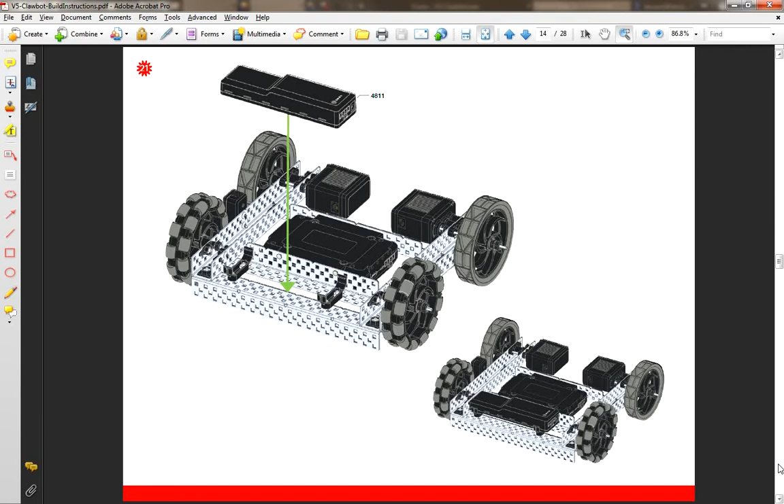Step 20 of the build instructions has you installing the brain with the VexIQ clips. Step 21 installs the battery. That will complete the speed build, as we will not be adding the flexible cables in our 3D model.

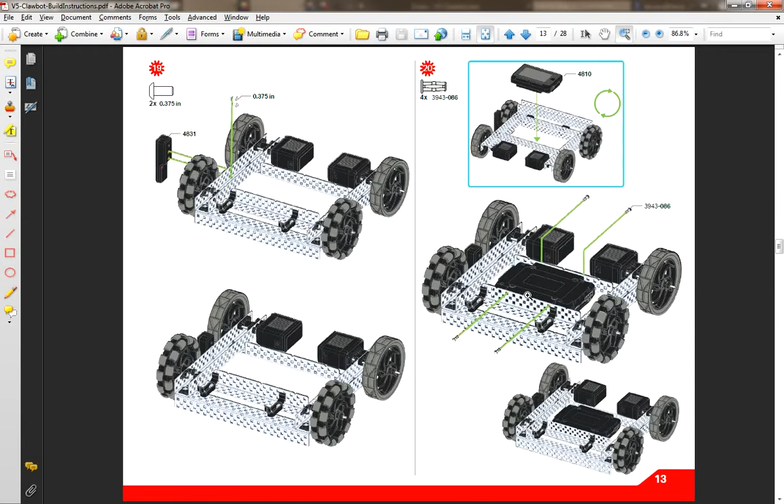So, details on the brain: it gets inserted between the two cross pieces, and the IQ clips go in the second hole on this side and the third hole on this side. It's not super critical to get the exact holes for the clips as long as they actually insert into the proper places on the brain.

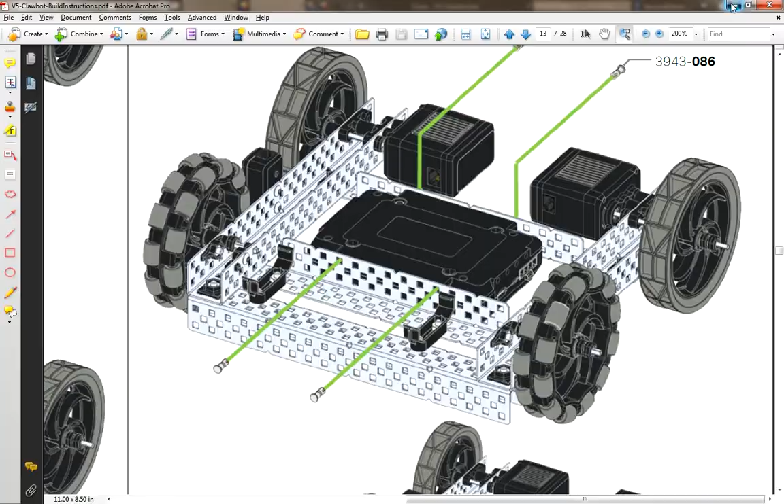So let's go back to Inventor. We'll place our brain, located in the Logic folder. Here's our V5 brain, set it off to the side a little bit. Now, to lock it in place, there are all kinds of iMates on here.

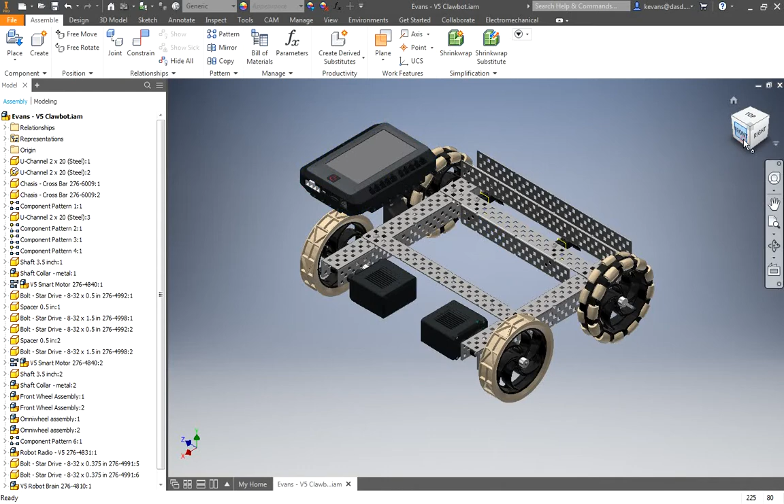Let's change our view, come in from the bottom. It might be a little easier. Over here is the edge of the battery where the cable will connect to it. So we need to make sure this side of the brain is connected by that side.

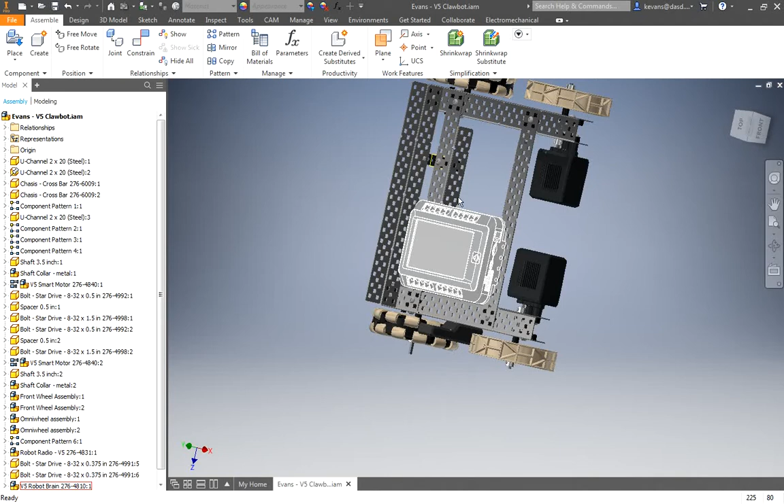So, top view, change my orientation of it just a little bit, go to free rotate. I'm going to spin it so that it looks a bit more like that, kind of drag it roughly to where it needs to be.

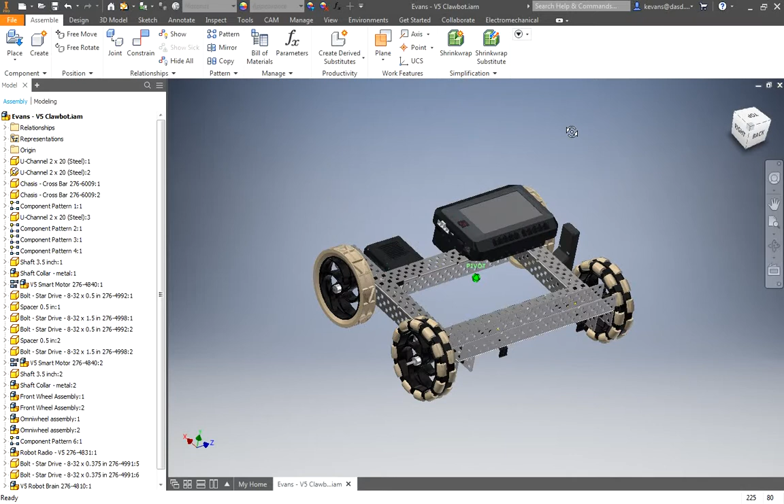There we go. The plug for the battery cable on the same side where there is room for the battery cable on the battery. Okay, and drop this view, lower it down a little bit, and work on inserting it.

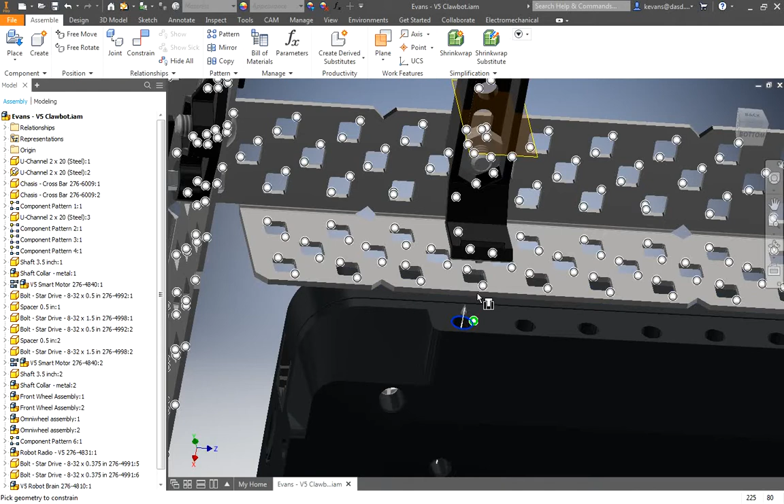So, this hole, that's what needs to line up right there. iMates should work fine. Lock that one in. I just need to lock in any other iMate together, and our brain is secured.

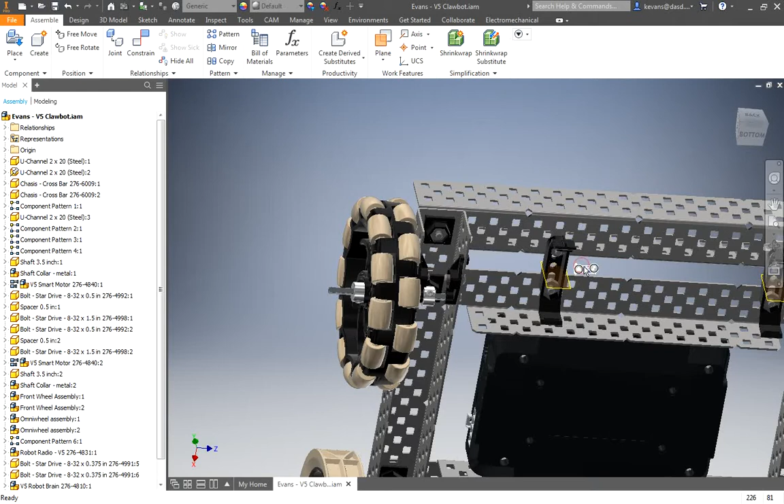I now need to place a couple of the IQ clips. They are in the structure folder, VexIQ rivets. Let's place one nearby where we need it. It's a simple iMate into that hole. Might be hard to see unless you zoom in. I was lucky and got it.

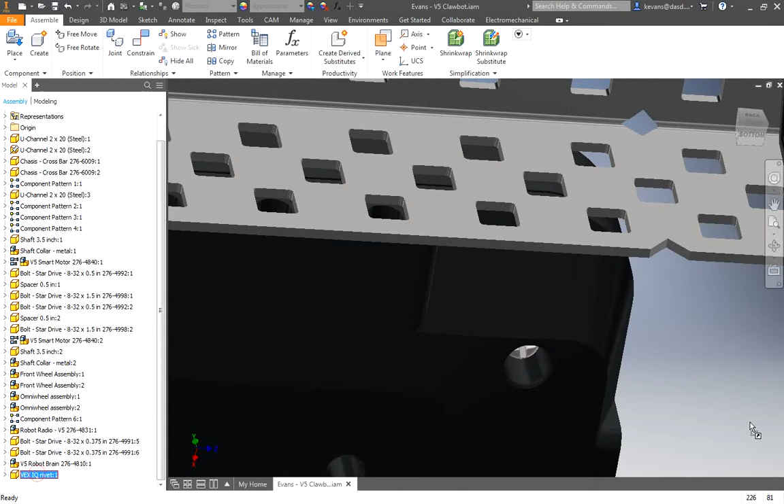Now I need another one here on this hole, the third one in from that indent. So let's scroll down, drag out another rivet, and iMate it in place right there.

Now, for a couple of rivets, I didn't feel it's worthy of actually doing a pattern to secure them. Just drag out another rivet. We'll just do them individually. It's just as quick.

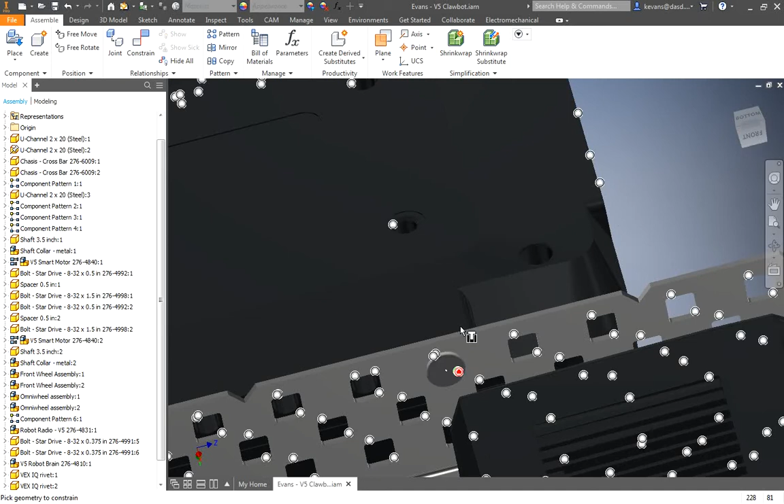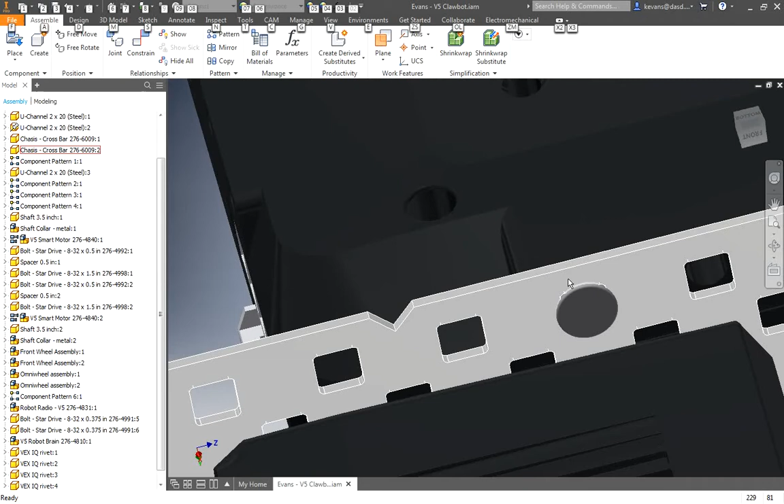Just make sure I got the right insert, that nothing's embedded. Like if I had accidentally grabbed the iMate off of the brain, that would be inside of the metal. You want to watch out for things like that. It's physically impossible, you don't want your model to show that. So we got the right iMate, and the brain is clipped into place.

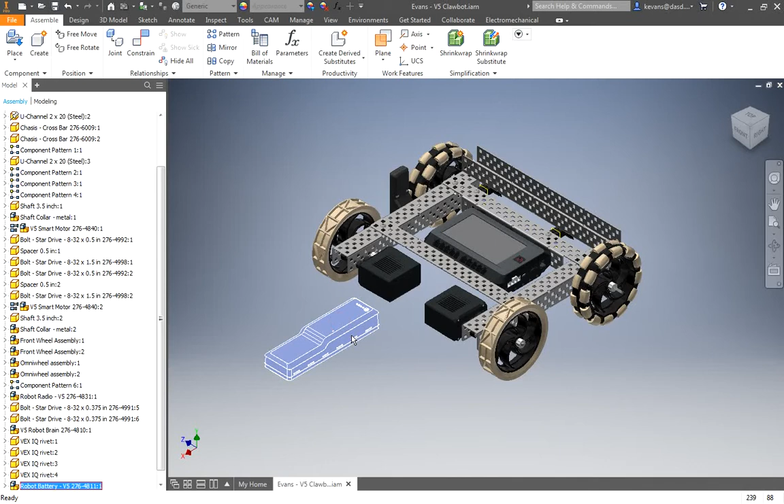The battery is located in the power subfolder. Bring a battery in, place it in place. Now the battery itself doesn't have iMates, there's not really any place to put a good iMate on it, and the sides of it aren't really perpendicular, they tend to slope.

So in order to constrain the battery, we need to go to the constrain menu. We're going to just do a mate. We're going to take the bottom flat edge of the battery, and we're going to zoom in, and I need to select a flat edge.

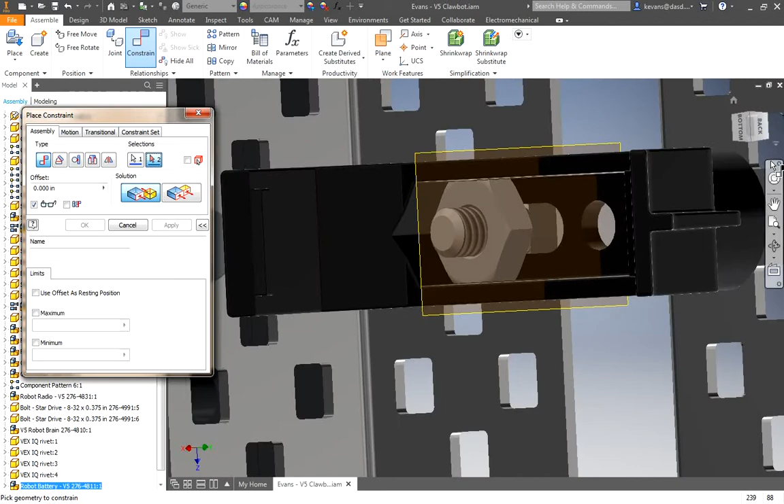Let me change my view a little bit so you can tell what I'm doing. A flat edge of this battery clip right there. I'm going to click OK. Now, the battery doesn't look like it's in the right orientation, but it's secured to that clip. I can't move it up and down away.

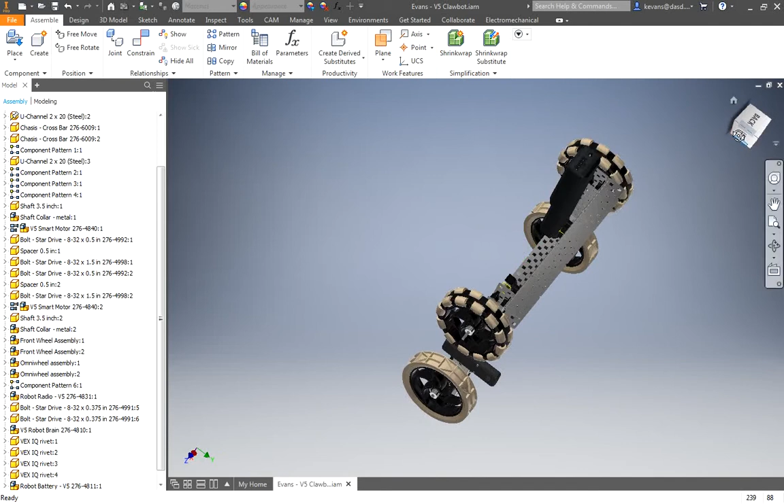Now, it looks like I can now, but I'm in a 3D view. If I actually click straight on from the back and I try to move this, it can't go that way. It can only slide up, down, in, and out.

Okay, now the other thing we're going to use to constrain it is this work plane that we have on this clip. It goes right down the middle of the clip. Now we need a plane down the middle of the battery, and I don't see one.

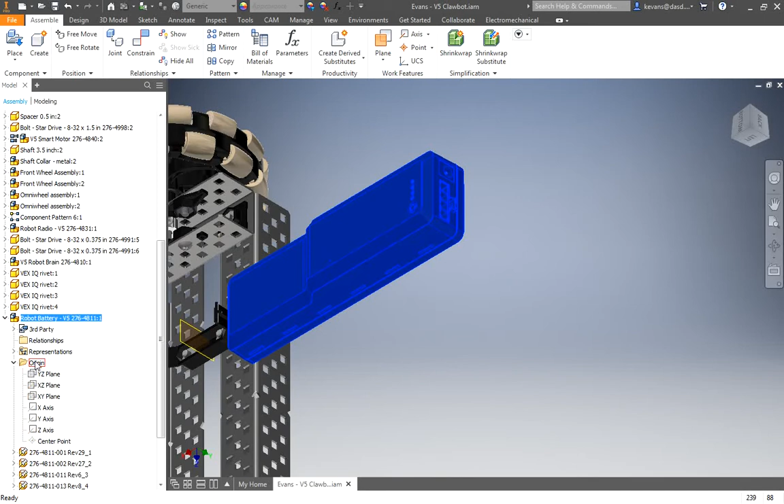However, if I go to my browser and I expand under the battery, there's a folder called Origin. Now, all the parts have this, and in it you can see where the origin planes were, the XZ, the YZ, the XY, and it just so happens the way this battery is constructed, the XY plane goes right down the middle.

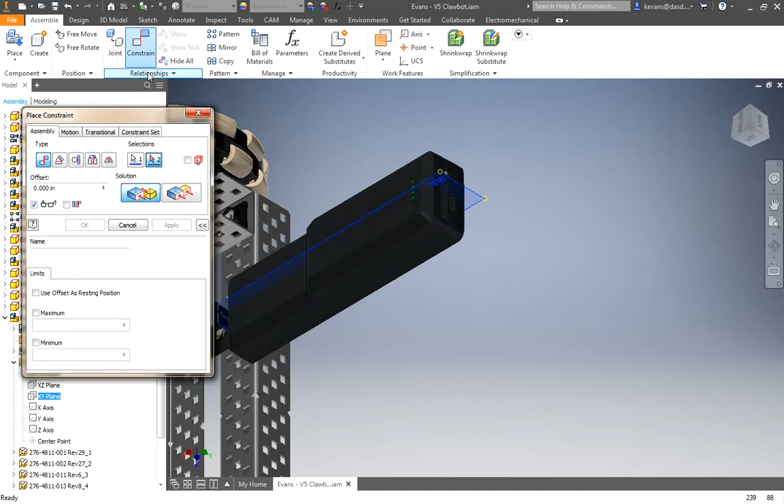I have it selected, you can see it on the battery. With it selected from the browser, go to your Constrain menu. We are just going to leave it on Mate, and I am going to mate it with that work plane. Be careful you actually get the work plane selected. And there you go, I'm going to click OK.

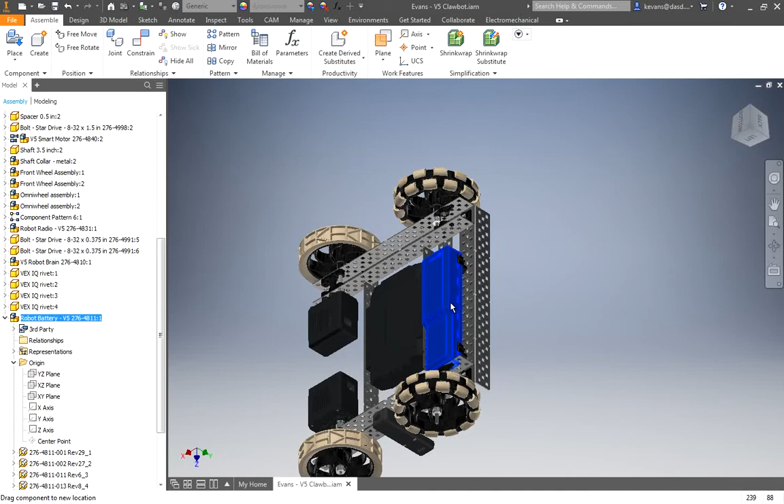Now it still slides this way, but it is locked in to that. To secure that, we're going to zoom in here. I don't know if you can see it, but there's a little plastic insert that sticks out there. If you can't see it, change your view angle a little bit.

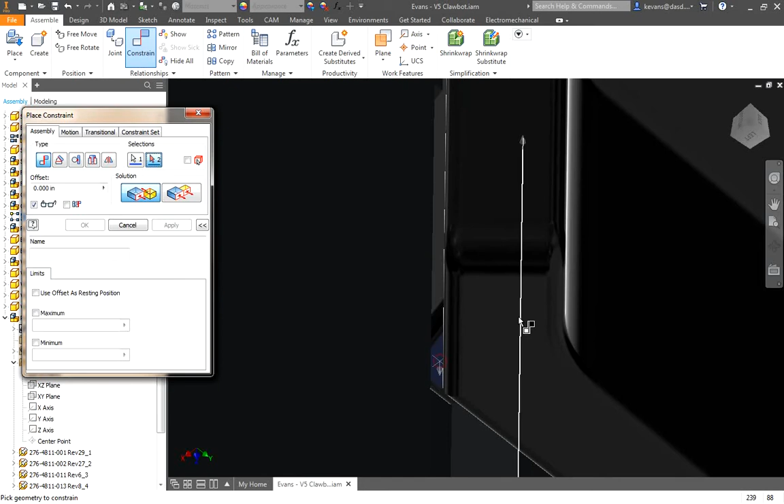I am going to mate that. Constrain. Again, I'm going to click that edge. And I'm going to change my view. I want to mate it to this edge and that little insert right there.

Click OK. My battery is now locked in place. There's room for the battery cable. If you look on this other edge down here, it's just far enough away. There's clearance for the axles.

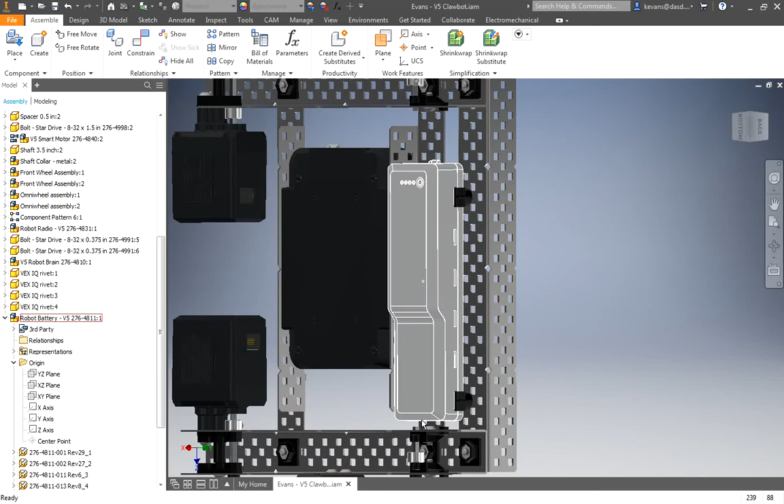Our battery is now installed. You still see these work planes here. It's not an issue. When we're all done, I will show you how to get rid of those. But at this point, we have the speed build completed.

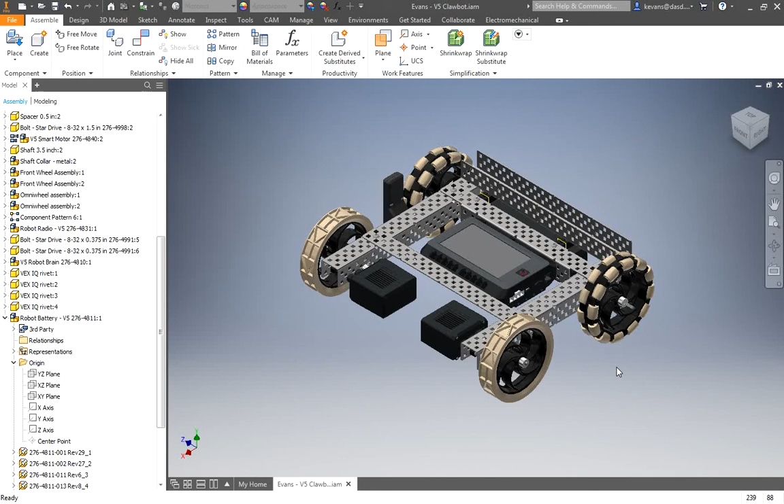We're moving on to finish the Clawbot. In the next video, we'll begin to assemble the tower.